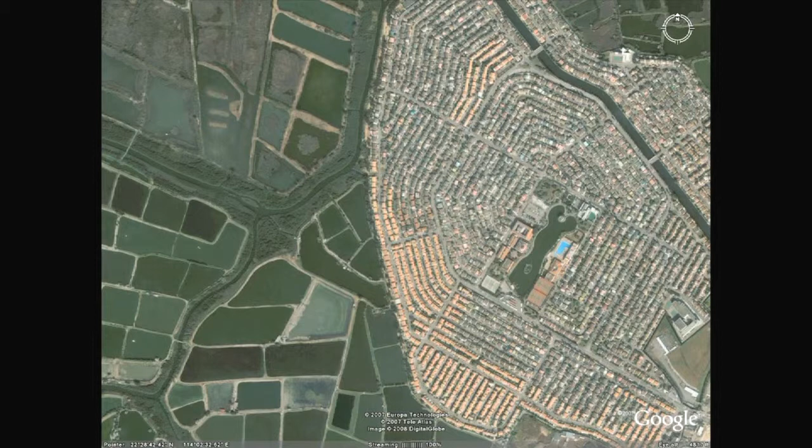So as part of this, we're questioning this divide. Do we need such a sharp divide between what is natural environment and a built environment? Within our own work, we're starting to combine these two together so that we have natural systems that co-inhabit. So we're using this project, water from the harbor, to bring it through to cool the building, to allow for a much more natural and green system.

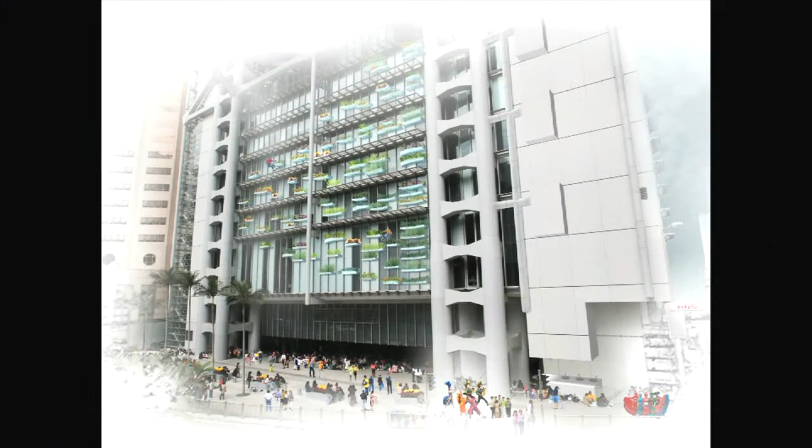Some of the projects we've done are propositions and interventions. This is a direct intervention into the HSBC Tower in Hong Kong, an inspirational masterpiece for the literature, history and cultural history of Hong Kong. Actively looking at some of the past archives, Norman Foster had wanted to produce a sky garden in the atrium, but here we actually actively intervene, propose, and integrate it into the landscape as a vertical system.

Testing these ideas at the Venice Biennale, instead of growing productive farmscapes of bok choy and choy sum like for our own climate as at the HSBC, here in Venice we were growing it for the Italian diet, such as basil, rosemary, etc. What's fascinating is some of these projects, we learn a lot from the prototypical testing, again growing our own systems.

Here is actually the Chinese lantern, which is a very popular plant in Venice. And we actually use this to cultivate our understanding of the climatic conditions. The Chinese lantern with a paper-thin skin of this project really elevates our understanding and producing, we would call, a new type of audience for the projects that we are installing at these various Biennale events.

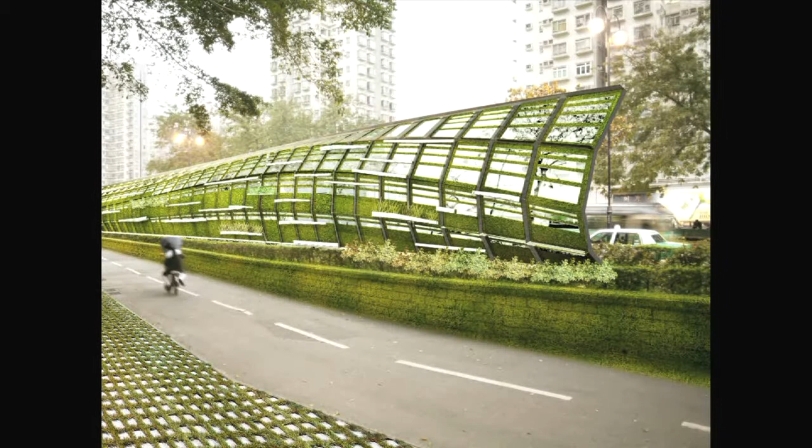As architects, we're not just looking as designers for buildings, we're also looking into the built environment in terms of what happens along the side of a highway, say. And this is a proposal for a noise barrier in Hong Kong.

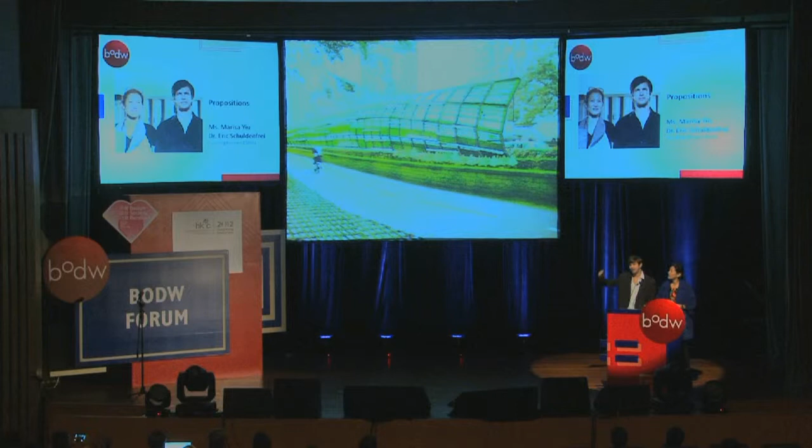The traditional noise barrier material in Hong Kong is this large-scale acrylic glass. And there's a problem with that, actually, because the birds that are migrating or moving through the city, they don't see the glass, and so they crash into it and then they die.

Instead of providing barriers that keep out noise but actually kill the birds, we're thinking about how we can create barriers that invite the birds back into the city. As part of this, we're using the greenery of the noise barrier to attract birds on one side, growing things that they eat like berries, and working with their habitat within the city.

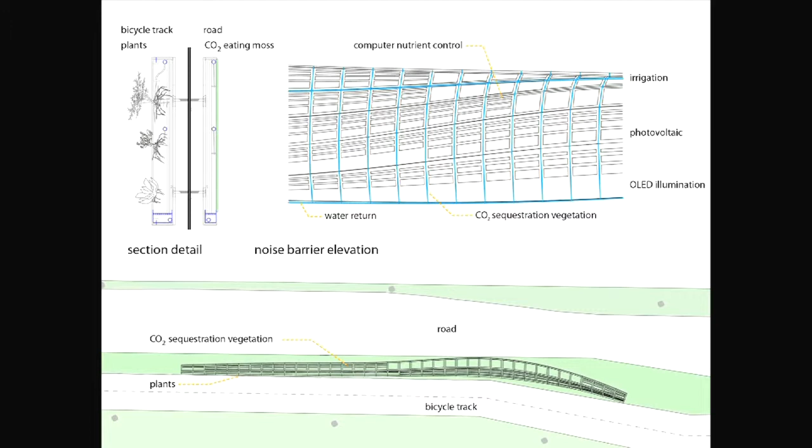On the other side, the side that faces the road, we're using a special type of moss that can absorb CO2 from the passing cars at a tremendous rate, much better than any normal plant. So one side of the noise barrier is the moss absorbing CO2, and the other side is the plants.

One problem we're also seeing is that there's not much integration between different components within the city. So we're proposing organic LED lights with built-in sensors. As cars move through the city, it lights the way further ahead, and when there's no car, the lights dim, so the whole city becomes dimmer at night and more environmentally friendly.

We're applying a similar concept for the pathways around the noise barrier. As you move and walk through the city, it lights the way more ahead, more intensely. There would always be some ambient light for safety, but it provides a new environment, and we're asking if there are ways the city can sense the individuals in it.

Instead of flipping a light switch on and off when you want light, the city essentially knows that you're around it and that you're there, and will provide light for you, resulting in a more energy efficient city.

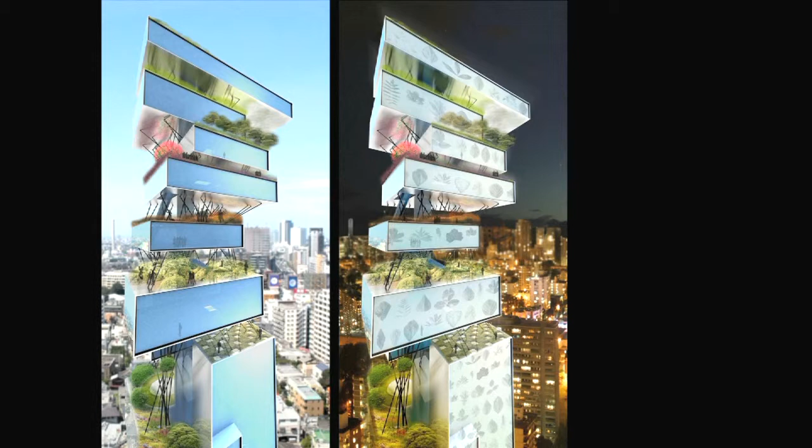We're also working on a proposal for a museum in Japan, and as part of this museum we're looking into different systems, including using liquid crystals in the glass. During the day, the liquid crystals can completely disappear and you just see through the glass as a normal piece of glass, but at night you could have the liquid crystals turn on.

They're very energy efficient and practically use no energy at all, existing just within the plane of the glass. So if you had the ambient light of the room, say someone was working late at night, you could use that surface of the museum as part of the artwork, and also as an environmental saving technique.

In the summertime when it's very hot, that facade could turn more white, reflecting ambient light back into the city and environment, reducing air conditioning costs inside. In the winter you could do the exact opposite, turning the liquid crystals dark to help absorb sunlight into the building, allowing it to be heated more efficiently.

Since it's liquid crystal and uses very little power to switch between these states, you could have variations through the course of the day. You could start the morning wanting more ambient light to warm up the space, while in the evening you could cool down and reflect that space out.

As part of our research, we're also questioning these generic cities growing up in China. In the last few projects, you could see a unique architecture that allows for a variable facade, but that architecture is being produced with mass production in mind, so that glass panels work as units you could plug into the buildings.

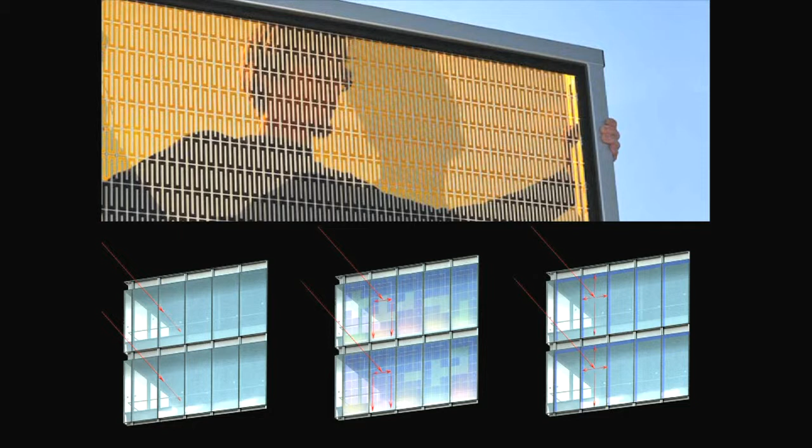On the market now, just about to be on the market, is a third generation of photovoltaic cells. What's remarkable about this photovoltaic is that it can actually be used with ambient light—it doesn't need direct sunlight to work. It's not quite as efficient yet, but it could start being used as a building material itself, absorbing energy during the day.

As part of our proposal, we're thinking about these as building units so that you can use any facade and start to build in this photovoltaics. If you even change the geometry of the building slightly, you could maximize the effect—say on the south facade, giving a slight angle. Or you could use the geometry to focus on certain solar cells too, to provide even higher impact of energy.

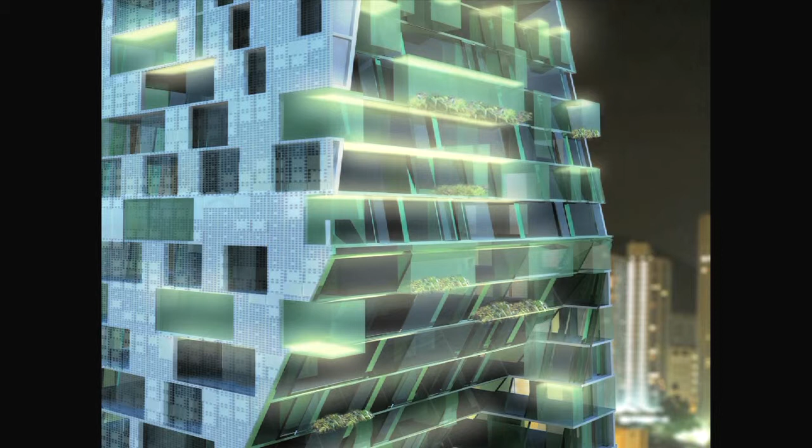On the left side of this image, you can see the solar cells absorbing the sunlight during the day. And then if we use organic LEDs, which are incredibly energy efficient, at night you'd have a building that really can support itself—one that doesn't need energy taken from coal or oil. It actually is self-sustaining as a building, as its own type.

As Eric mentioned, we are really interested in technological advancements and innovation. But a lot of the work we should do as designers and architects is also look back at history. Hong Kong itself offers, again, a lot of inspiration.

75% of Hong Kong is countryside, but at the same time we have approximately 263 islands, all connected by a water body to Shenzhen, Guangdong, Zhuhai, Macau, and Taipei. There's an incredible richness of resources that often, as architects and designers or even urbanists, we forget about.

This becomes a contentious way for us to propose new types of living or new types of industries, and potentially new types of harvesting and using, again, resources carefully.

Looking back at Aberdeen, which has a very interesting fishing village and floating platforms and contexts of industries, we are often very much inspired by how we used to work or used to operate, and learning from the kind of local communities.

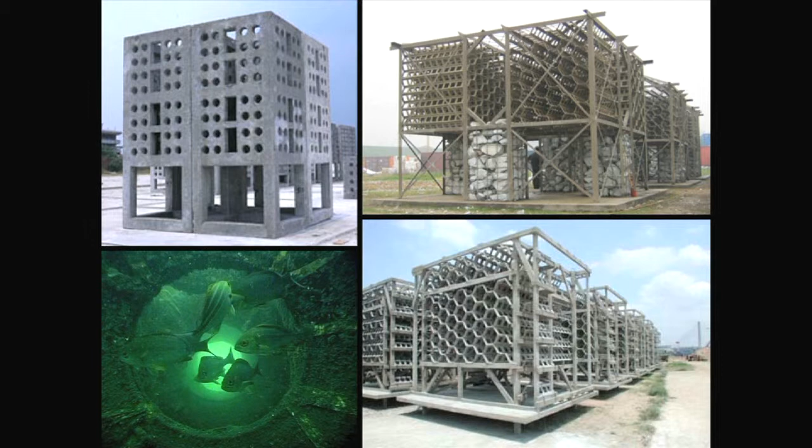These structures are both potentially bringing in new types of artificial reefs, looking at the underwater spaces of harvesting and producing—such as this one, which is a pulverized fly ash concrete structure that becomes the artificial reef building material for an abundance of diverse fish species below, in the underwater.

We're also potentially proposing architectural towers and structures as island features, digging into the ground to produce piling structures for thermal systems—integrating both a locality and the infrastructure itself, the soft and the hard infrastructure.

Similar to some of the projects we've done at the Venice Biennale recently, in Hong Kong this year we tested this idea with the aqua industry fountain display integration, where we produced a prototype in the water fountain that immersed these concepts together within the structure of Kowloon Park, growing aquatic plants which are actually medicinal, and which also allow a series of new growths as a responsive resource back into our own environment. This is continuing through all our projects.

Resource Vitrine itself is a way to collaborate and rethink our role, as Eric was saying, in questioning what this generic city is, or what the Pearl River Delta is, and what is actually connected to Hong Kong and beyond. Since 2000, we've been steadily documenting manufacturing and factories in China. For example, one in Hushan operated by 250,000 workers, which has its own ecology and community, with canteens and cafeterias within those structures, questioning our role as consumers, not only in the commercial world but also for the locality of farmers and ecosystems within that logic.

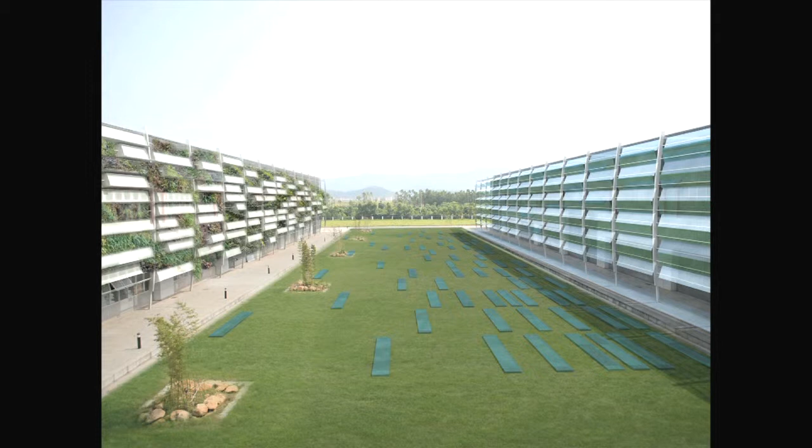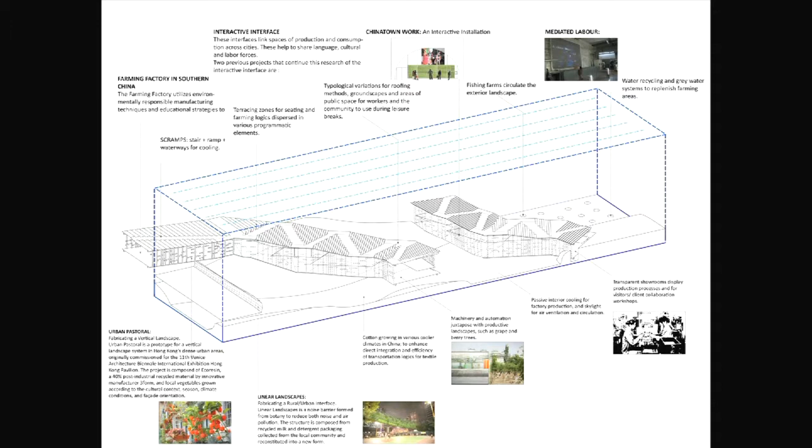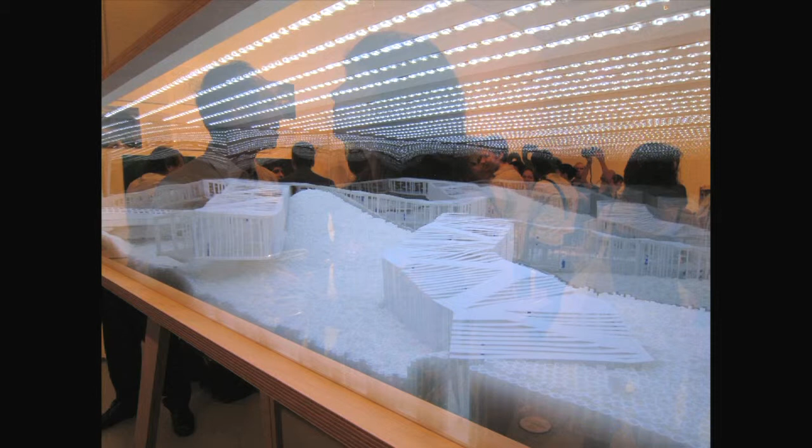All this led to a prototype for a new type of factory model, integrating the ideas we just mentioned into an installation vitrine for a project called the Resource Vitrine. This vitrine was shown in New York City, and we really wanted to bring across the idea of how someone can view this, especially when all the projects we were showing were in China. We wanted to show that the person, even in New York City, had some sort of connection back to the projects they were seeing.

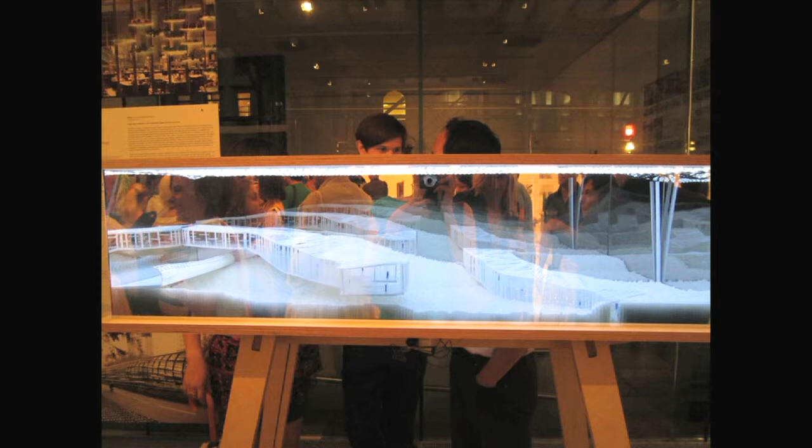As part of this, we built the vitrine out of two-way mirror glass. When the viewer was at a distance from that glass, say halfway across the room, it would turn into a perfect mirror. But as you walk closer to the space, the light on the inside would turn on, allowing you to see right through the mirror and into the vitrine. So your own presence would basically make the vitrine react. As you grow closer, you can start to look into the vitrine. We wanted the person viewing it to have this immediate connection and feel their own body in space, through a very simple interaction as you walk closer.

This is an interaction we're looking at more closely in a project we're doing for Nike, which just happened actually. Nike developed a new technology which allows them to essentially knit the shoe together from one thread, knit to form the shoe itself. What's interesting about the technology is that most of the shoe is made from recycled trash, our own trash that we just throw out, which they re-knit to form the new footwear. We're creating a new video for this in order to express those ideas.

We are working with ESKYIU, artists based in Hong Kong, for this new interaction design. Instead of a very simple linear interaction, this one is entirely 3D. If you stand in front of this, you can sense your own body, and see how it's being knit, involving the relationship between the environment around it. We began to think of new ways that knowing this body in space might start to interact with how we design buildings.

I have to admit, often as designers or artists, we forget the discipline. Beyond the discipline, there's always other incredible inspirational models. The first time ever, I met LeBron James, not knowing who he was, but he interacted in that installation as the most incredible basketball player. That was a side note of how the interactivity of the project allowed it to bring other types of audiences together.

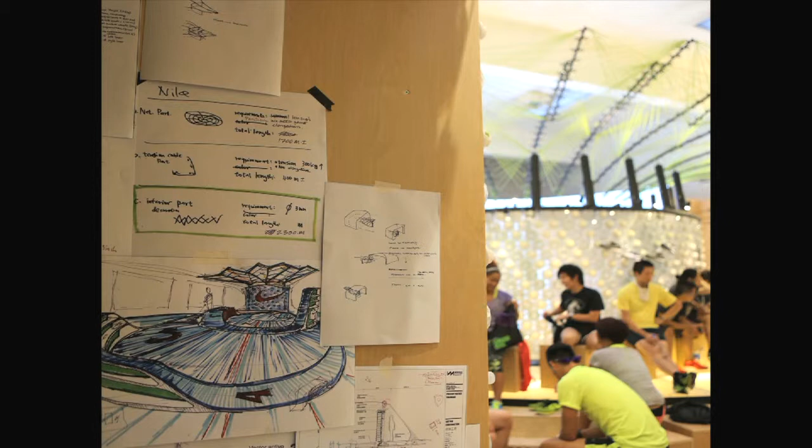As artists and designers, part of this project was a curatorial effort inspired by the four tenets of this shoe. We engaged and collaborated with LED artists Kevin and Teddy Lowe to question our activities as consumers, inspired by the Flyknit project, a shoe with four tenets of sustainability: lightness, form-fitting, and others. What's really great is we curated and worked with 25 young creatives from all around China to come up with questions, debates, discussions, and activities based on this incredible lightweight shoe made out of 100% recycled material, highly innovative, with 20 years of R&D to produce, leading to a lot of discussion about our role in society as consumers.

We ran through the cities of China, creating digital and analog mappings, thinking about health and society, and also engaged with incredible output with various artists. This was a collaboration with LED artists to produce light bracelets that would track motion through space.

The participants made light paintings using slow, long exposure photography. We also worked with a sound artist based in Shanghai to record sounds at the venue and really challenge their perception of sport. Can we use recycled materials from everyday use and remake sport from those materials?

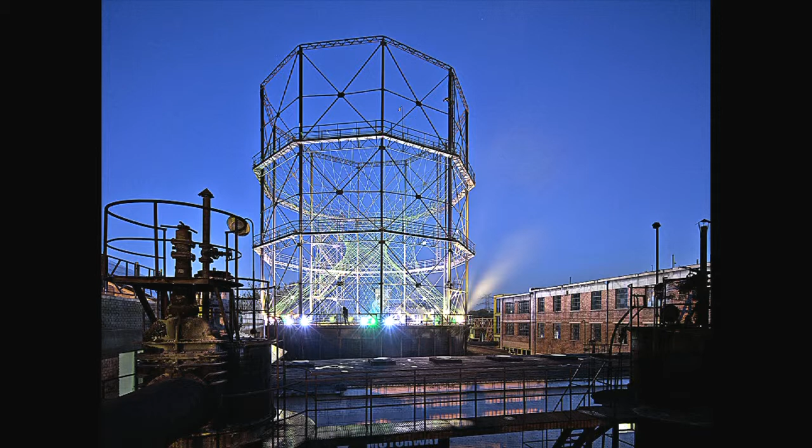This culminated in a very exciting installation by Minivis from Taipei, and as a group we created an intervention at Beijing Design Week this October, in an old industrial neighborhood called 751. It was really nice to see the whole creative process exhibited and engaged dynamically with the sound projects, working with other disciplines to create new types of audiences and events.

So as I suppose our role, we are extremely interested in the interface of all these disciplines. Again, very lucky in 2009 to be selected as curators for the Hong Kong Shenzhen Bi-City Biennale of Architecture and Urbanism, a very long title.

Our curatorial theme was BYOB, Bring Your Own Biennale. We were very lucky in 2009 to use the West Kowloon waterfront site for a 3-month-long exhibition with co-curators Alan and Frank. We built temporary pavilions out of paper tube for the first time. This one is by Shigeru Ban.

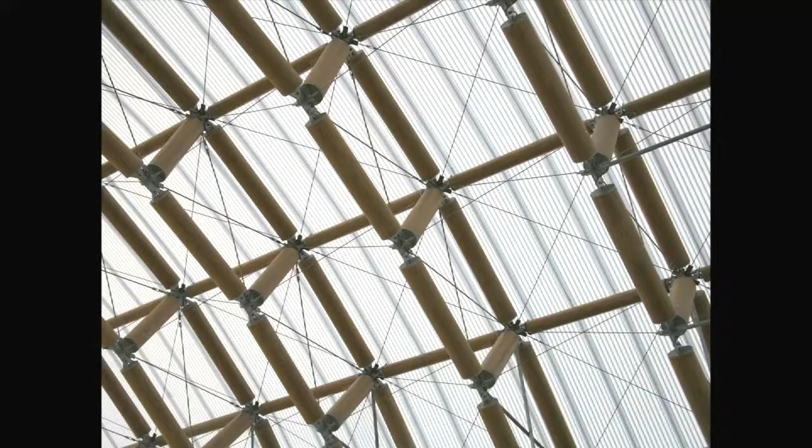We worked with younger artists and designers, building farms, testing technologies using internet cable to grow plants, LED lights, windmills, wind farms, using recycled cartons to produce projects, and working with Shubing to educate and engage young children from all over Hong Kong.

Younger kids presenting themselves and joining community events, new types of experimental music, activating our waterfront and our roles as designers in the built environment. Very important was the Asia Society in Hong Kong, building new audiences and bringing new types of personalities and demographics.

I suppose everyone keeps saying the 60-year-old is the new 40 today. Everyone's more active, more dynamic, and how do we bring this type of audience to be critical to how we use our environment? So we had artists such as Kacey Wong, who made a paddling home, his own home.

A very small home, but incredible because it had this amazing view across the harbor. As we know in Hong Kong, all our homes are outrageously small. In the city, over 85% are under 650 square feet, so it's an incredibly small environment that we actually inhabit.

However, how can we maximize this as a housing situation as well? Really, how can we make more comments? How can we use art, technology, and architecture to make comments back into the city, to send a message, more or less?

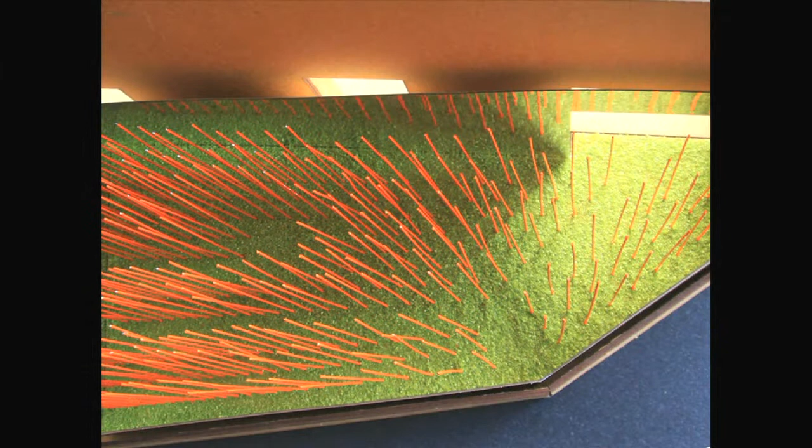This project is special because it situates itself in a neighborhood in Hong Kong that is undergoing rapid transformation. We acknowledge transformation and progress, and we are believers in it, but at the same time we want to respond to that kind of change in a way that could provide questions to our built environment.

So the system of metallic poles are dynamic. They are inspired by Wong Chuk Hang, the neighborhood we reside in that's under transformation. The Wong Chuk is basically yellow bamboo, which is both artificial and natural, cultivated but also produced with a sort of fabrication technology.

And we are laying out a kind of turf grass system, growing out with both artificial grass and real grass, testing that as another kind of carpeting system for the exterior. We're very excited to present this, as it's also close to Aberdeen and all the newly constructing MTR, mass transit railway systems and highway systems.

So very much hope you can all see this very soon, a art space in Hong Kong that is also promoting local and international exchange. And I think that's my timer.

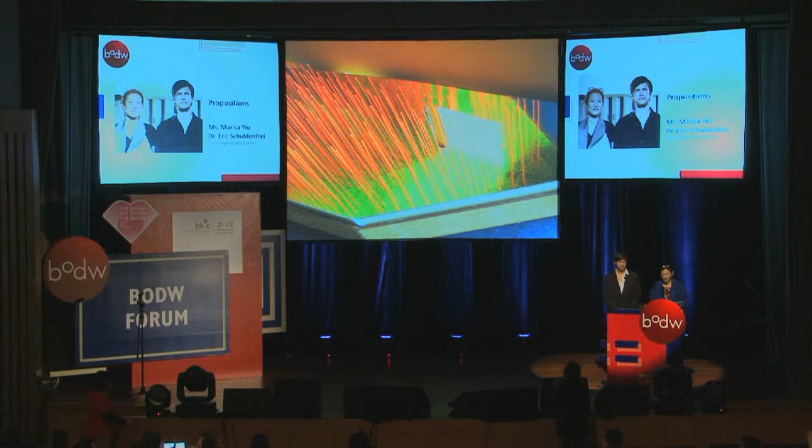Thank you, Marisa, and thank you, Eric, for your very interesting, very diversified, very thoughtful kind of strategies to deal with our environment, not just Hong Kong, but across the border to China as well. So it's time to take questions from the floor. Anyone would like to ask a question?

Your designs deal mostly with concepts that are considered relatively new, be it new technology or new materials. What are some of the challenges that you face from clients, and how do you manage their resistance to change?

We're actually working a lot with manufacturers. Some of the newer technologies, even some we can talk about today, we're working directly with some of the manufacturers themselves. So we're really trying to implement change from within. And that's actually exactly the question they always ask us, how is the best way to actually implement this type of change back into the product?

Things like the photovoltaics and the liquid crystals, we're working directly with the people who grow or make the liquid crystals, essentially, so that we can experiment and test these ideas more or less in the laboratory and then bring them into manufacturing later on. So by the time we use them in the building, they're actually part of a more established process to test them. But that's a great question, and I think there should be more room for experimentation.